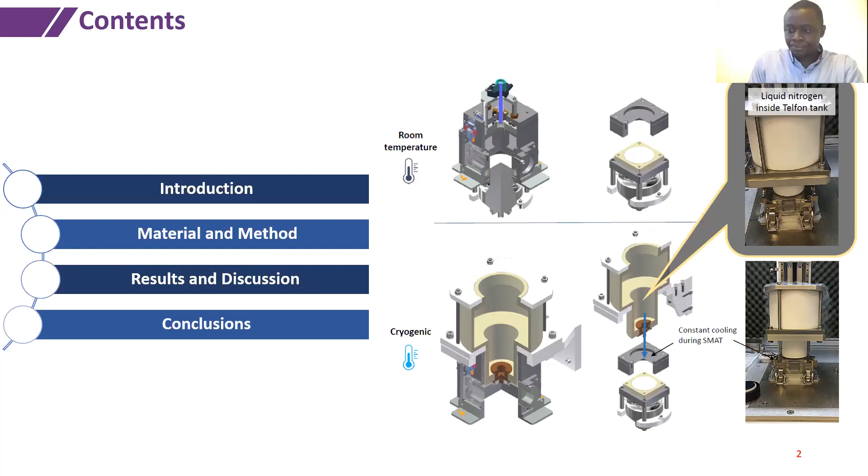I'll be talking on the passivation behavior and corrosion properties of surface mechanically treated 17-4 pH stainless steel. Temitope Olugbade, Mechanical Engineering Department, CityU. Quickly, I will report the material and method, the results and discussion about the surface treatment we apply on the material to create a surface region on the material, then I will conclude this presentation.

A very quick background: most material failures occur on the surface of the material, and this actually leads to degradation of the material from the surface to the core region. Because of this problem, there are processes that have been developed.

As you can see, we have three of them: coating or deposition, and hybrid nano-crystallization. However, the major problem associated with coating and the last method is that the chemical composition of the substrate and the material is somehow different, and this may lead to problems. Most importantly, there's relatively poor bonding between the surface layer and the substrate, and this also leads to very poor corrosion resistance.

Hence, we came up with a method, as you can see with my cursor. This method creates nano grain layers on the surface layer through plastic deformation. The most important thing about this method is that it improves the mechanical properties of the material: hardness, yield strength, ductility, and tensile strength.

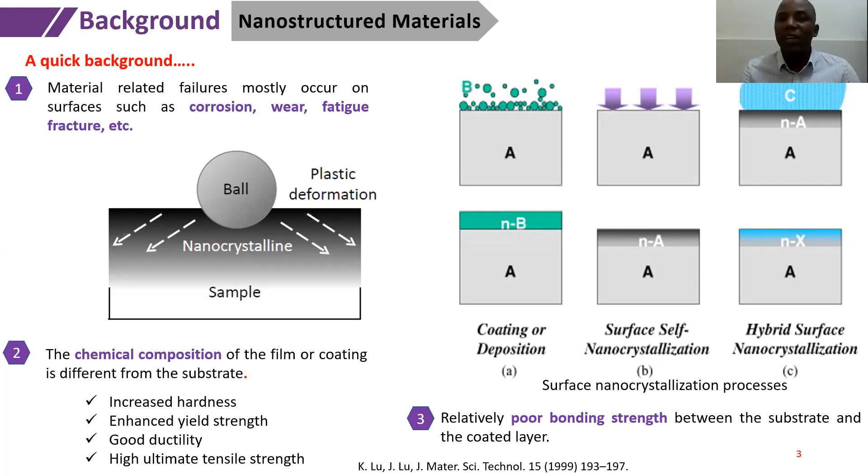Now, we have various forms of this surface treatment, but among them, there's one particular one being developed in my group, which we call surface mechanical attrition treatment. This method involves the bombardment of the surface of the material with very fast, high-moving balls. As you can see here, we have the resonant spherical balls. The ball moves at a very high speed, hits the surface of the sample, creates a nanograin layer on the surface, then creates a nucleation site, thereby enhancing the property of the material.

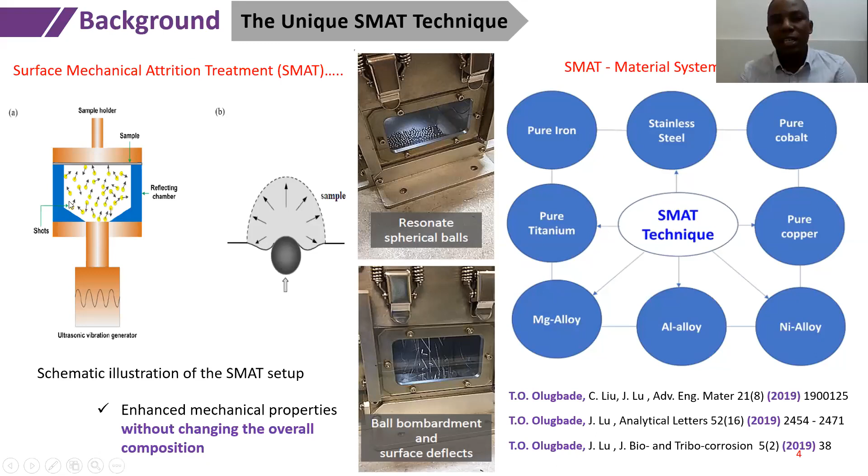One good thing about this method is that it improves the properties of the material without changing the overall composition. This method has been applied to materials in our group, and some of them have already been published and made known to the public. Recently, we summarized the properties of the materials after applying this method, and that has also been published in Nano Materials Science. This shows that this unique SMAT method has been widely recognized as a method that can enhance the properties of a material in terms of mechanical and corrosion properties.

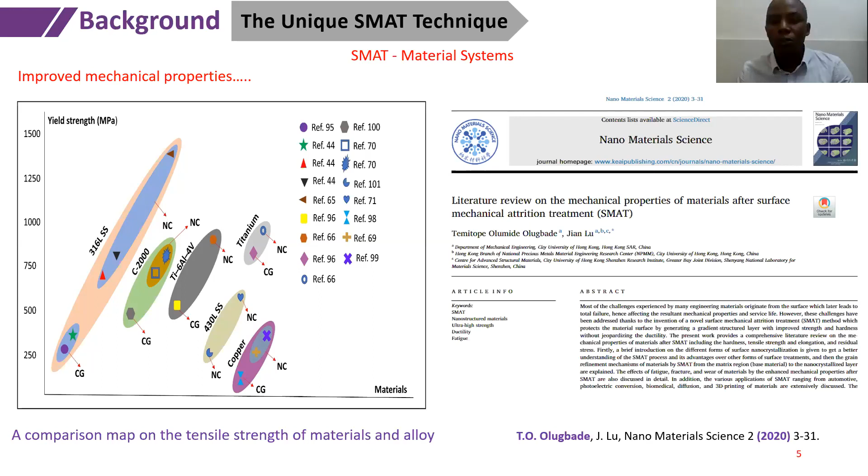Now, that is mechanical properties. Let's come to corrosion property. The properties in terms of potential, current density, Nyquist plots, maximum phase angle, impedance, and Mott-Schottky analysis, and the stress corrosion cracking behavior.

Also, methods can be applied in two forms. Now, we want to apply the SMAT method to improve the mechanical properties and also to improve the corrosion properties. I hope you get the logic.

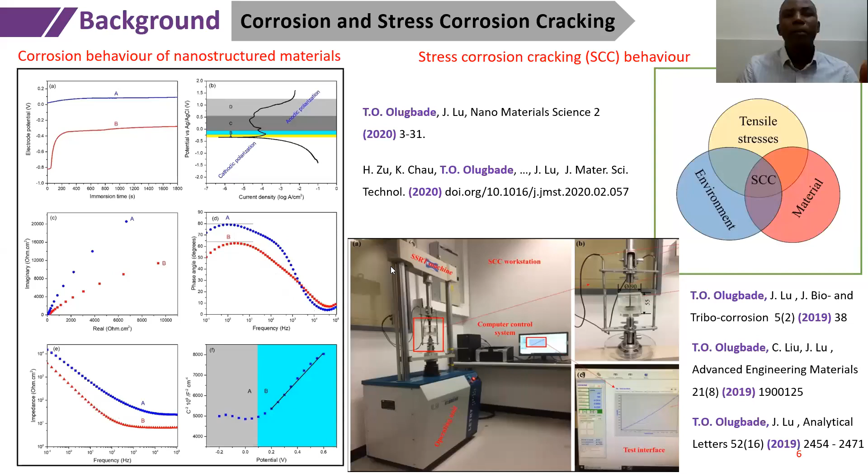Now, the major material we use here is 17-4 pH stainless steel. This material is chosen because of its very good attributes, which include high toughness, ease of fabrication, and high hardness for enhanced reliability. This material finds application in many automobile, aerospace, and oil and gas industries, in fact in most manufacturing companies. But most especially, this material is peculiar to aerospace and automobile industries because they use it. So it's a very hot cake material for automobile and aerospace industry.

However, there's a problem. This material experiences failure under aggressive corrosive environments. When combined with tensile stress and a corrosive environment, this material also fails. That is why we came up with this method to see if we can correct this problem, improve the properties of this material so that it can be fit for these companies and reduce the level of corrosion to the minimum, and serve as supply to most companies that we have around.

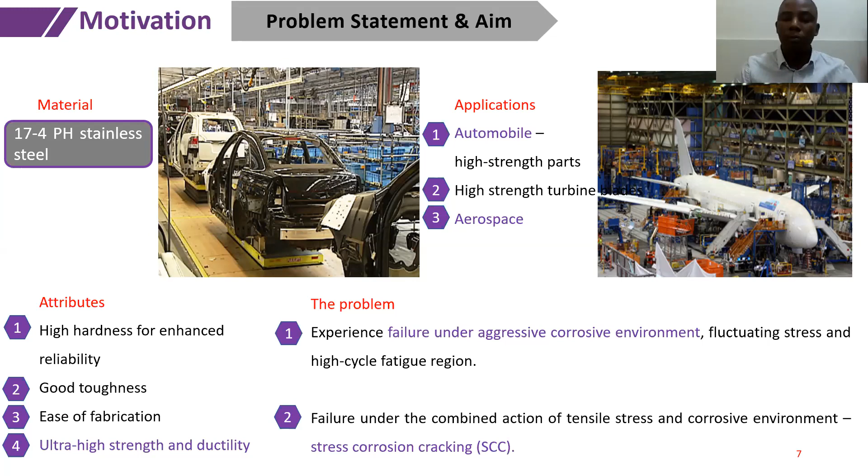Now the TEM process shows that there's a structural, longitudinal, about 50 nanometer grain on the surface of the material, and we have some dislocation clusters on the surface of the material, and this actually contributes to the improved properties of this material.

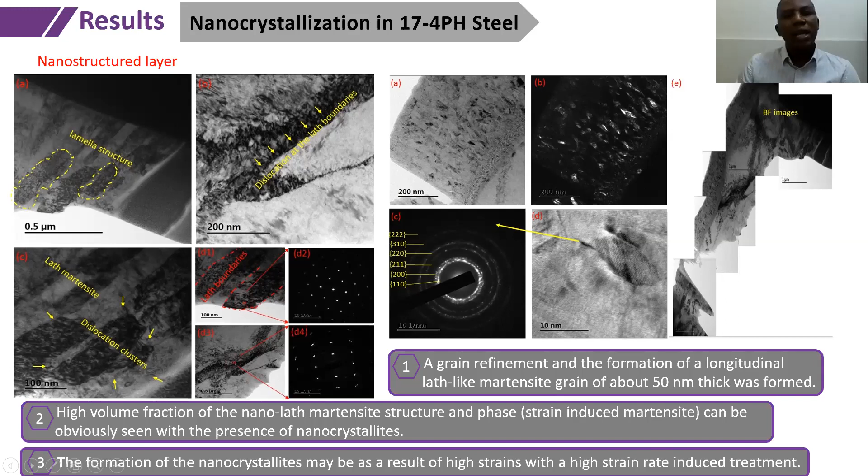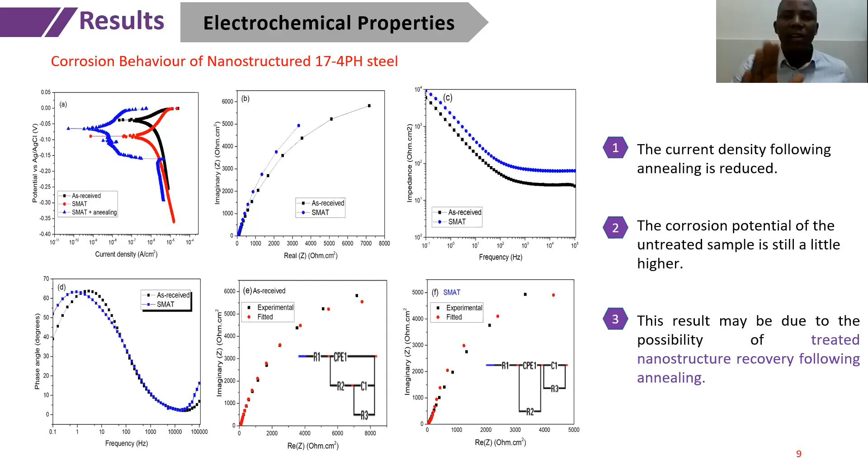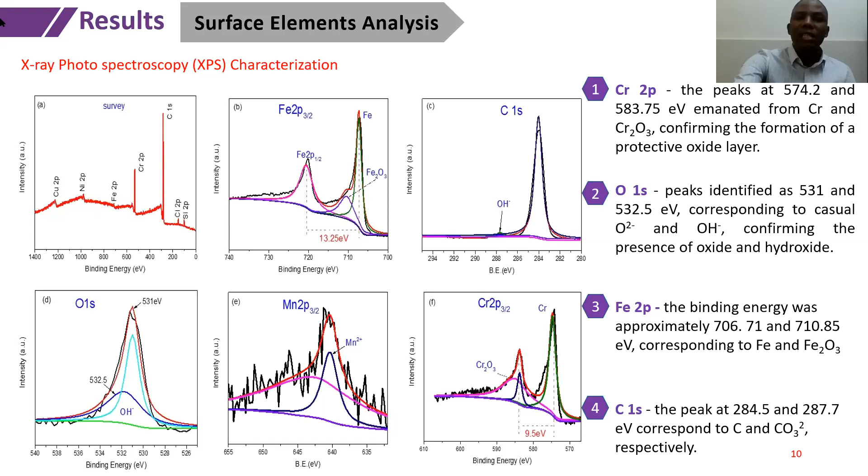We went ahead to do the surface element analysis to see if we can characterize this material. Our method shows that all the elements in this sample contribute to the corrosion properties. Also, the amount of chromium in a sample plays an important role in corrosion properties. We notice that our sample treated with SMAT annealing has the highest level of chromium, which shows that it has the most important corrosion properties.

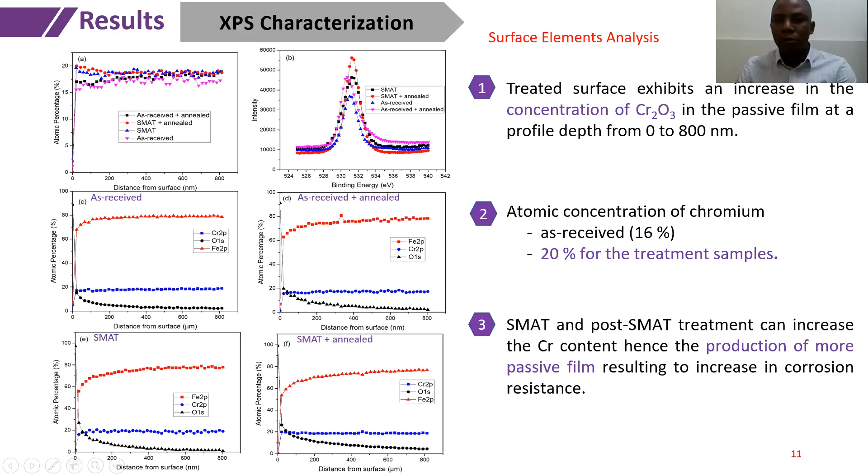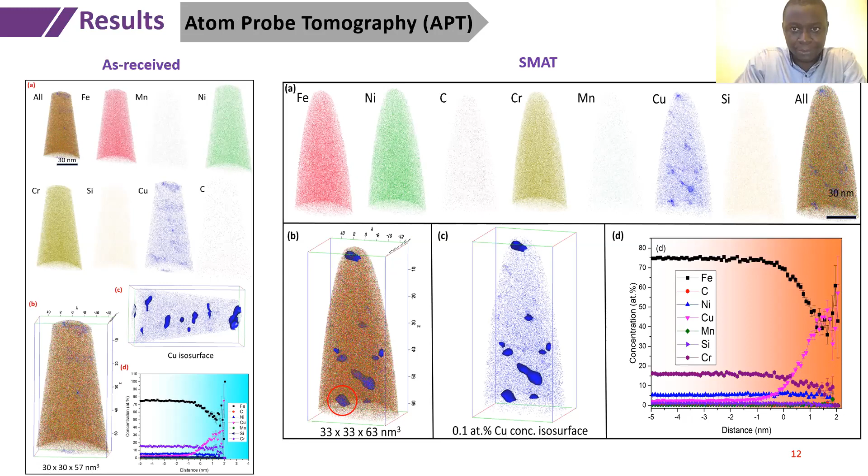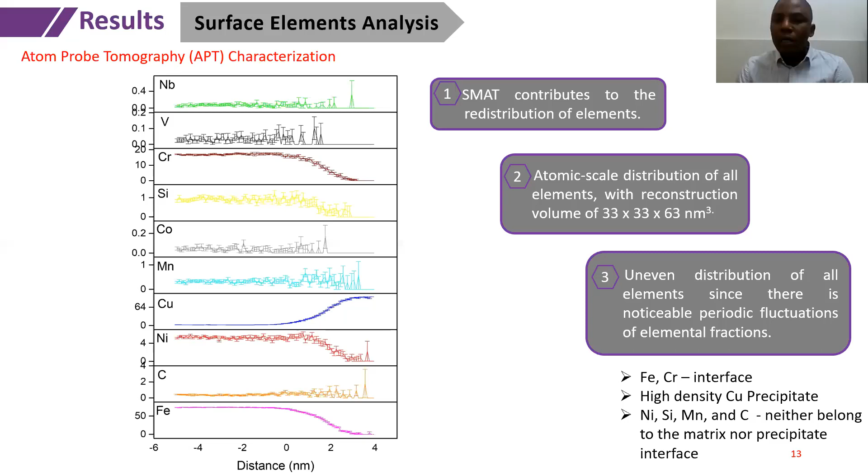This is a summary of the APT that's also talking about the improved properties of the material. And this is also part of it. The corrosion reaction shows that we start from dissolution of iron to iron 2 ion and generation of hydroxide ion and formation of local alkaline environments, and all this contributes to the corrosion reaction.

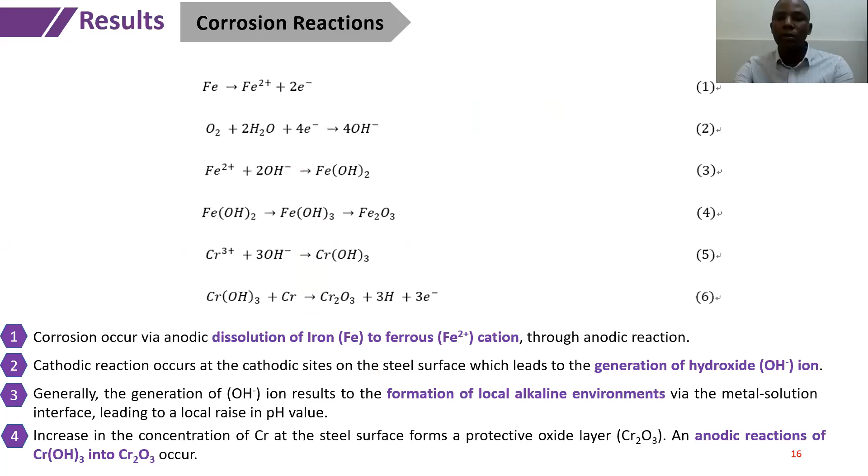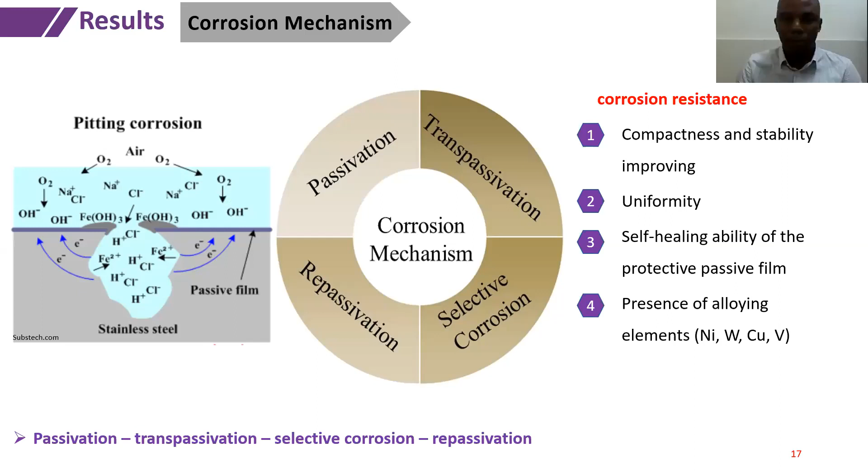In summary, this is the corrosion mechanism from passivation to transpassivation and repassivation, and this actually prevents the pitting corrosion. The major application is the fabrication of turbine blades. In conclusion, this can be summarized as follows.

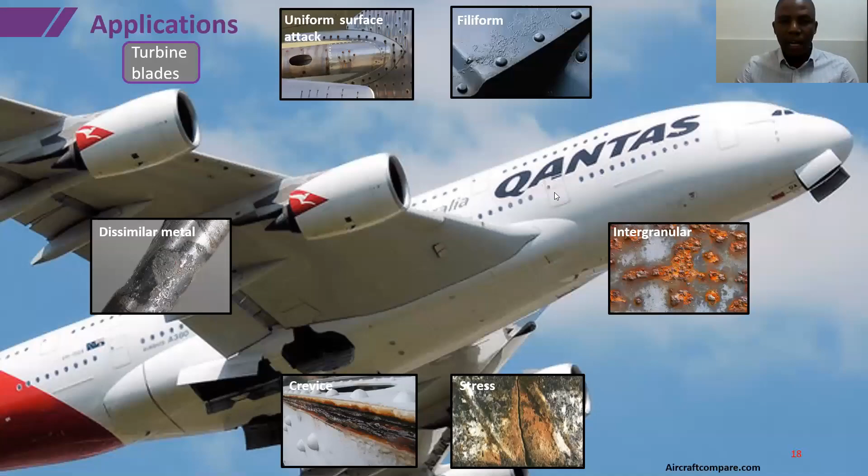Number one, we have an ultrasonic ball bombardment on the surface of the sample. This creates a surface layer on the sample, and after this, it increases the free energy within the sample. Thereby, the plastic deformation activates dislocation. And with more plastic deformation, the dislocation accumulates and forms some density.

From here, we have boundaries that are divided into several regions, and this opens a nucleation through which chromium can move from the bottom of the surface to the surface of the material, thereby creating a passive layer on the sample and preventing corrosion to the minimum.

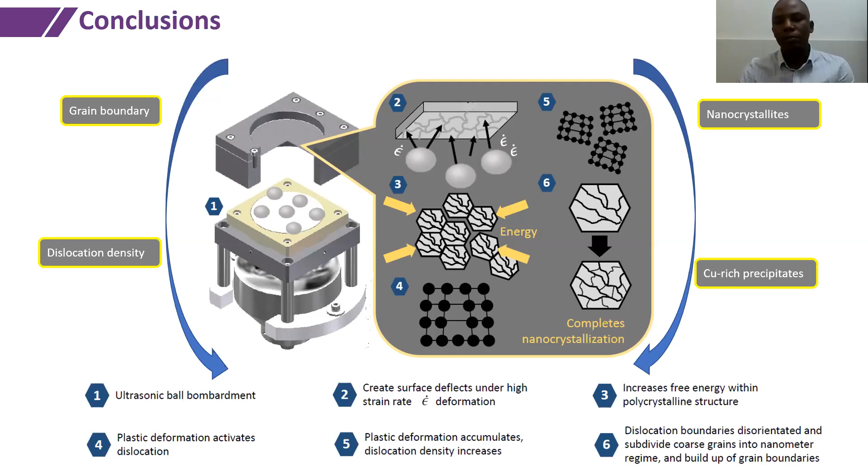And this is the future work. You can extend this work to other parameters and other alloying elements.

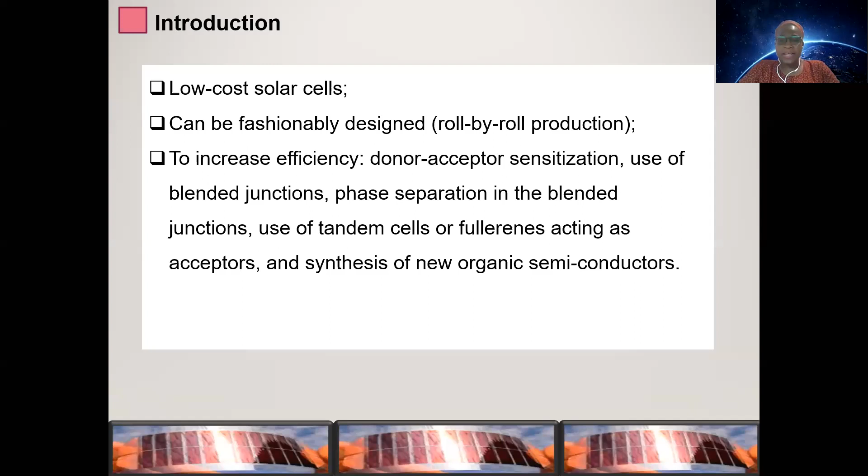So in this study, a little about the history and trend of the research: starting from 2000, organic solar cells attracted a lot of research interest following the outstanding features I presented earlier. In this study, we fabricated a polymer blend of hexylthiophene and butyric acid methyl ester polymer based on an inverted organic geometry, or inverted architecture. Then we annealed the active layer at different temperatures and studied the effect of annealing on the performance of the device.

Usually, the organic solar cell with inverted geometry has this structure or architecture. The working principle is that sunlight, or a light source, falls on the cell, and then charges are separated, and you can use this separation of charges to load your device. So this is the framework that we adopted.

And the hypothesis which led to this study is that we said we're going to introduce this layer, hoping that when we introduce this light-absorbing agent layer, it will enhance light absorption, which will automatically translate to improving the power conversion efficiency of the device.

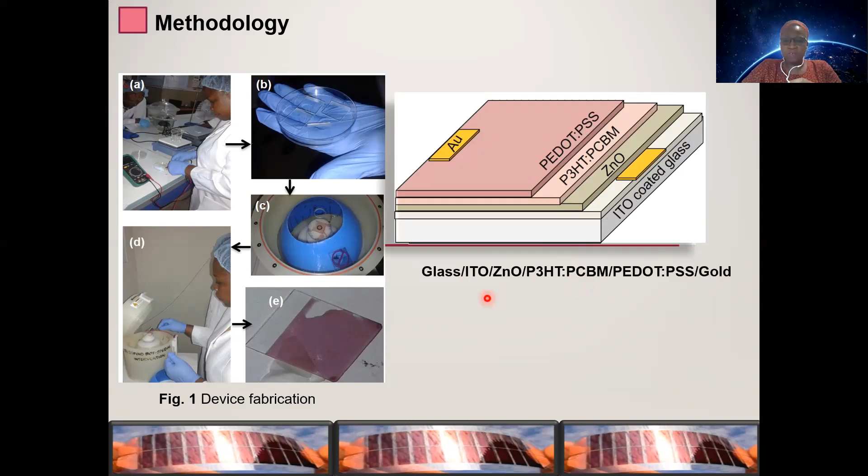The results showed that annealing the active layer actually increased the absorption. We can see from Figure 2A that in the wavelength range between 450 to 650, increasing the annealing temperature increased absorbance.

And the power conversion efficiency calculated for these devices showed this is without the light-absorbing layer, and this is with the zinc oxide layer. So you see from here that the power conversion efficiency was increased, and the optimum annealing temperature was achieved at 130 degrees centigrade. We have almost a 61.37% improvement in the efficiency of the solar cell that was fabricated.

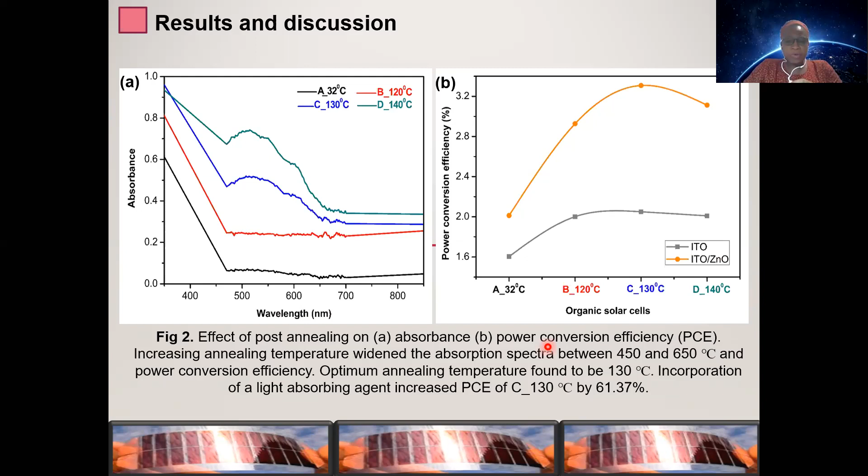So in conclusion, post-annealing of the active layer increased the power conversion efficiency of the organic solar cells. The optimum annealing temperature was found to be 130 degrees Celsius, compared to studies in the literature and from our previous study.

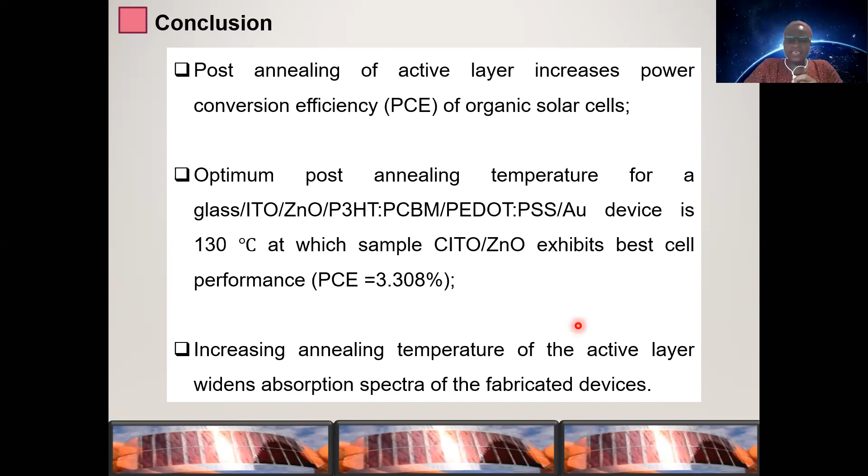The results tallied, and the optimum device fabricated had a power conversion efficiency which is actually a bit low, but also better than others reported in the literature. An increasing annealing temperature of the active layer widened the absorption spectrum of our fabricated device.

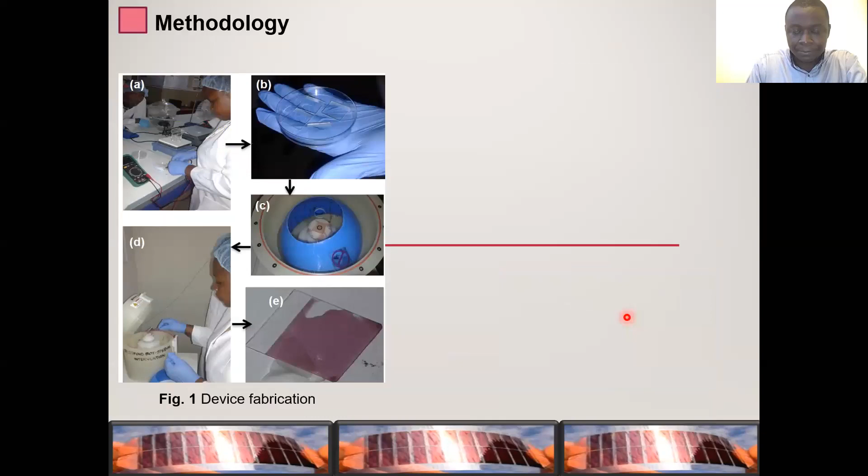At room temperature, when the study was conducted, and then we varied annealing between 120 and 140 degrees Celsius. Okay, thank you for that. Another question, please.

Okay, so in the absence of another question, I would like to ask you a couple of questions. The first comment I want to make is that if you are trying to show us the efficiency chart, I think it's recommended if you use the one from the National Renewable Energy Lab. It is more reliable. The second question I want to ask, do you get what I mean?

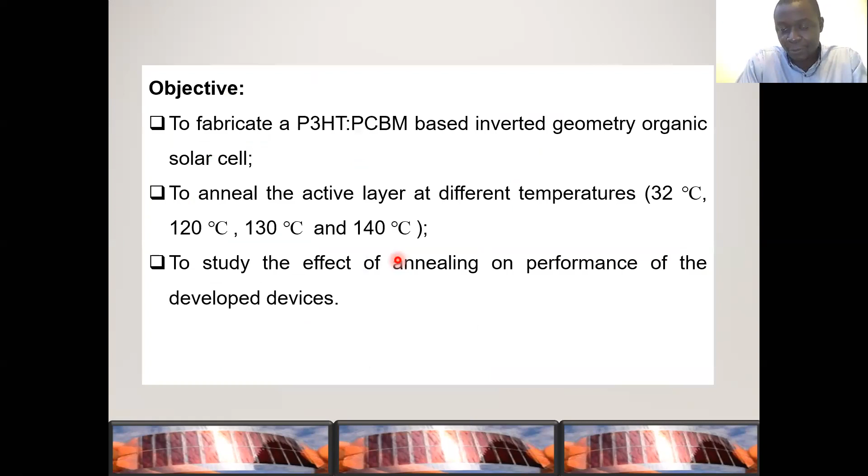So I want to ask, what is the science behind the morphology improvement? Because when you talk about realigning the morphology, you are simply looking at improving the absorption, the light absorption, and perhaps converting it to power, to current or whatsoever.

So what is the science behind your method being able to improve the morphology that leads to the improvement of the efficiency? This study is actually unique in the sense that a large part of it was carried out in Nigeria before I came to Hong Kong. That was about 2 years ago, and that was actually what attracted researchers in City University. It's something we hadn't achieved in Nigeria before then.

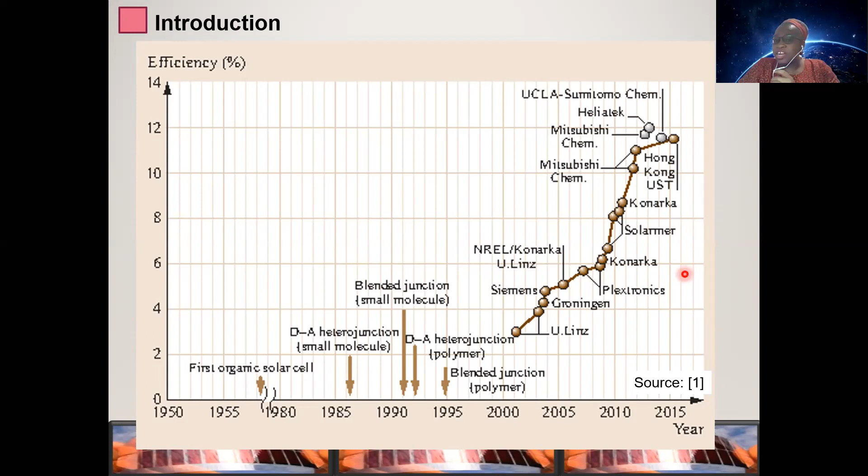So finally, as a comment for you, I like what you are doing because from the literature, we realize that organic solar cells are definitely the future. So if you can stabilize it, if you can further the work, escalate the work, then I think it's going to make more sense. One thing I also noticed in your work is that with the arrangement you are giving us, it looks like a heterojunction. Yes. You should definitely have very good conversion efficiency, so you have to go back and reassess your work and see how best you can improve it further.

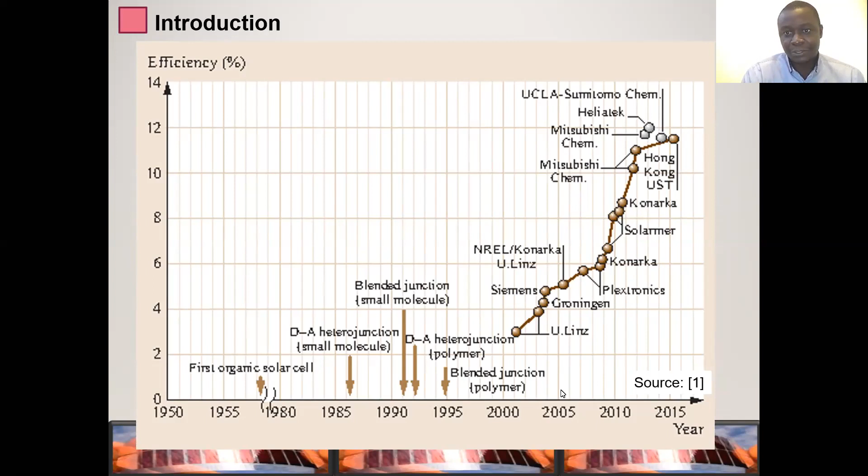Hello, Dr. Akini, are you there? You want to take over? Okay, sorry, we already had a private chat, so I thought it was handled.